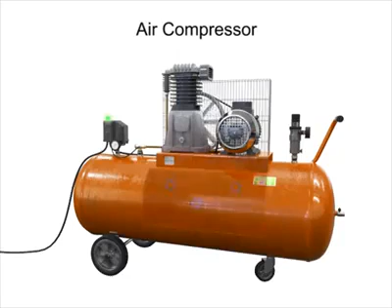An air compressor is a device which takes input mechanical power, typically from a motor, and converts it to fluid air power. The compressed air can be stored for later use in compressed air tanks, or it can be transferred via pipes to a point of use.

Compressors with a piston as the compressing element are called reciprocating compressors. Compressors can also be made with vanes or impellers. These types of compressors are called rotary compressors.

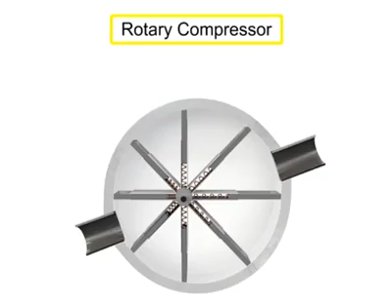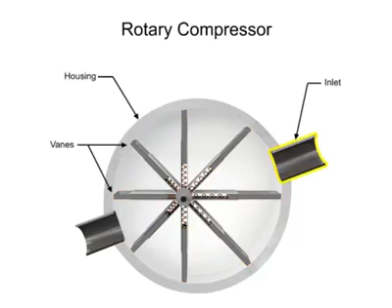Rotary compressors typically consist of a cylindrical housing with adjustable rotary vanes, an inlet, and an outlet. The vanes are on an off-center drive shaft. As the shaft rotates, the vanes slide in and out to maintain contact with the cylindrical compressor wall. As they do, they create chambers within the cylinder of varying sizes.

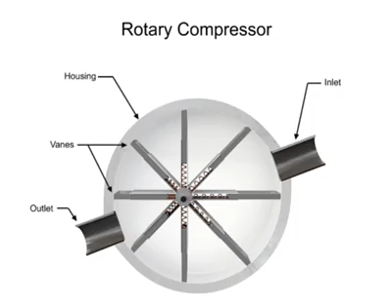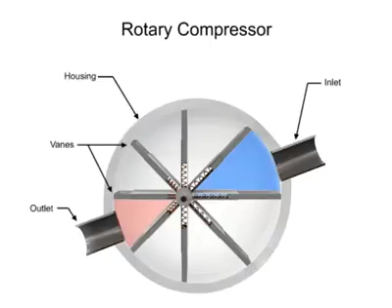Air enters at the largest chamber. As the vanes rotate, they retract, causing the chamber to get smaller and compress the air. Air exits at the smallest chamber. Rotary compressors are typically free of the vibration and pulsation that occurs with reciprocating compressors.

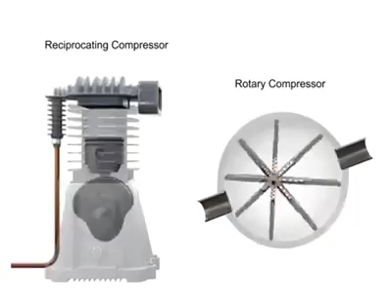A typical reciprocating compressor consists of a housing with an internal piston connected to a crankshaft. As the crankshaft turns, a piston reciprocates within the cylindrical housing. There are two valves at the head of the cylinder, an inlet and an outlet.

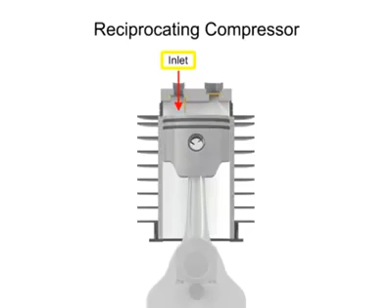The inlet, sometimes called the suction valve, allows atmospheric air to enter the cylinder. The outlet, sometimes called the discharge valve, ejects the newly compressed air from the cylinder. As the crankshaft turns, the piston lowers and raises, changing the available volume within the cylinder.

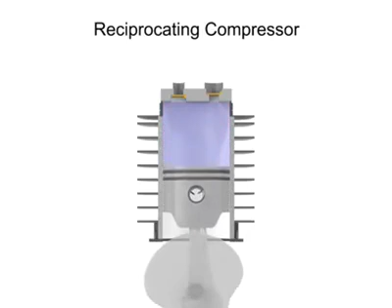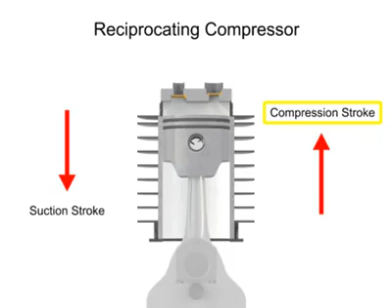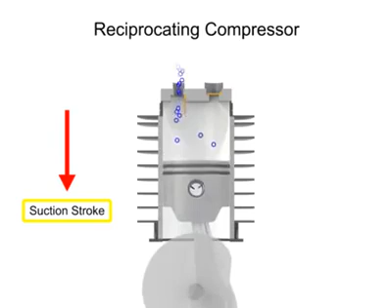The downward stroke of the piston is called the suction stroke. The upward stroke is called the compression stroke. As the piston moves downward on its suction stroke, the volume increases within the cylinder. As the volume increases, the pressure within the cylinder becomes lower than the inlet air pressure. This allows the higher pressure outside air to push open the inlet valve and allow more air into the cylinder.

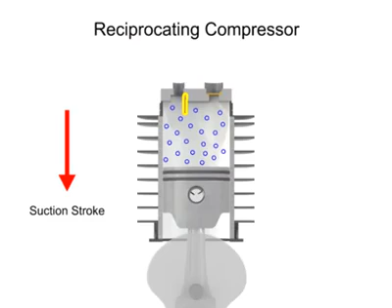As the piston begins its upward compression stroke, the volume within the cylinder decreases. The decrease in volume causes the pressure within the cylinder to increase. The increase in pressure opens the outlet valve and compressed air discharges from the cylinder.

This is a single-stage compressor. It has only one piston and cylinder and compresses the air in only one stage. A single-stage compressor typically has a compression ratio of 5:1 with an output pressure of about 50 to 75 psi.

As air is compressed, it becomes increasingly hot. If the air becomes too hot, not only is the compression cycle less efficient, but there is the hazard of an explosion if any hydrocarbon material, such as oil or lubricant, comes into contact with the overheated air.

To avoid the hazards of overheating and still generate higher pressures, manufacturers make compressors with multiple stages. The air is compressed in the first stage, which is typically the largest stage, then cooled, then compressed in a second stage.

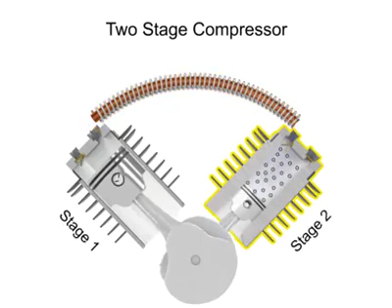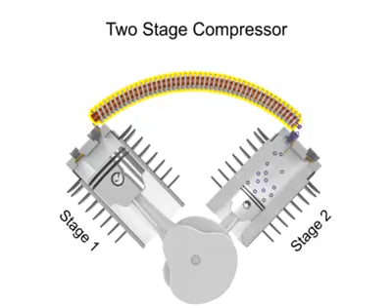The hot compressed air from the first stage is conducted to the second stage through finned tubing which is exposed to the air from a flywheel fan. After the air is cooled within the tube, the compressed air enters the second stage to be compressed even further.

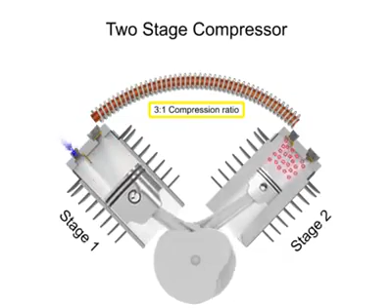The compressed air entering the second stage is sometimes called supercharged air. Two-stage compressors have a compression ratio of 3:1 or even less per stage, but can operate up to 175 psi. They can also deliver more air at a higher pressure than single-stage compressors of the same horsepower.

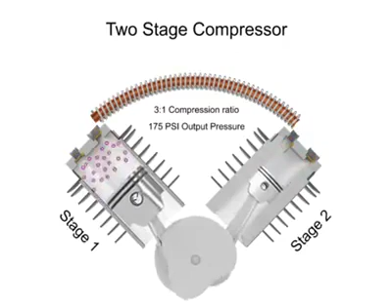If pressures of more than about 175 psi are needed, multi-stage compressors should be used. On these larger compressors, cooling may take place by circulating water instead of air. To reach a pressure of 2500 psi, as many as 6 or 7 stages may be needed, with cooling between each stage. Their versatility makes compressors one of the primary components in air production.